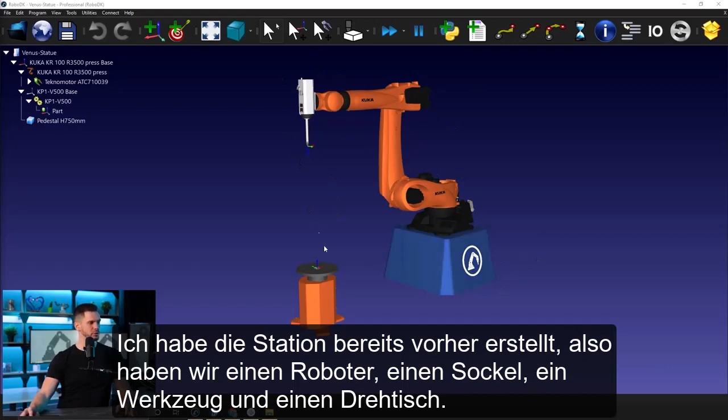Let's start inside RoboDK. So I pre-created the station. So we have a robot, we have a pedestal, a tool, and a turntable. So the first thing you need to do is synchronize the turntable and the robot together. This is required so that when RoboDK generates the robot program, it makes sure to have the turntable at the right position for every move, and that both the turntable and the robot will synchronize their speed together to give you the best finish possible.

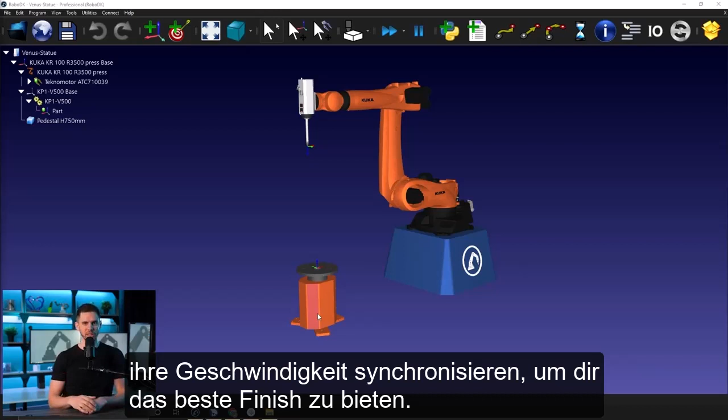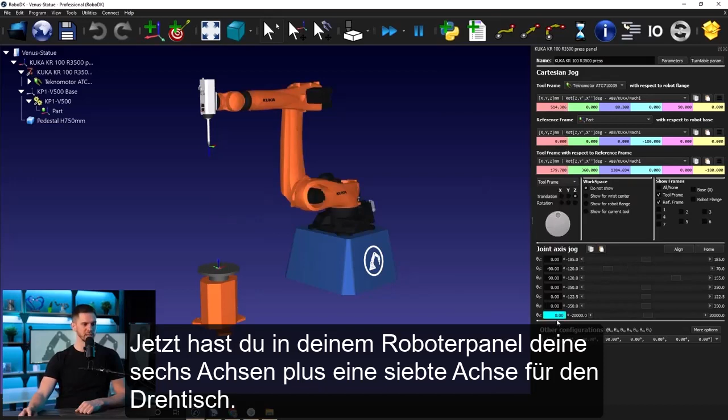So to do that, fairly easy. You right-click the robot, you select Synchronize External Axis. It will bring up this window here. You select under Turntable and Linear Track your turntable, in this case the KP1 V500, and you click OK. You will now have in your robot panel your 6 axes plus a 7th axis for the turntable. And here you will see a small kind of chain link showing that those are synced together. So that's great. Okay, now let's open BobCAD.

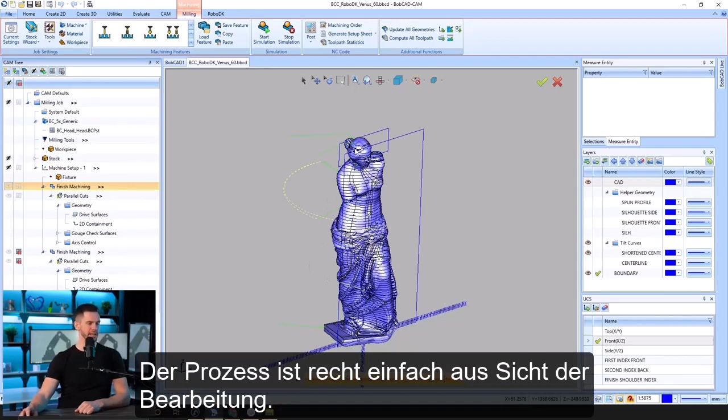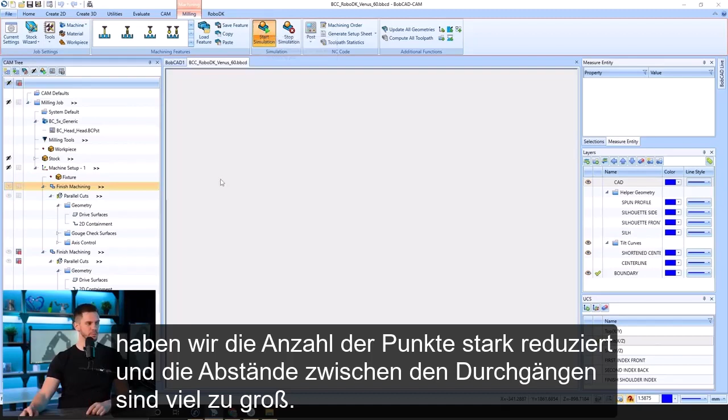So for this example, we have indeed a life-size statue. So the process is pretty simple from a machining standpoint. We'll just do a spiral from the head to the feet, starting from the top and going down. For the sake of keeping this example simple and for it not to take forever in terms of processing, we greatly reduce the number of points, and the passes are way too far from one another. We would recommend you to have better machining parameters than that, but this is just so that we keep the number of points relatively low to speed up the process.

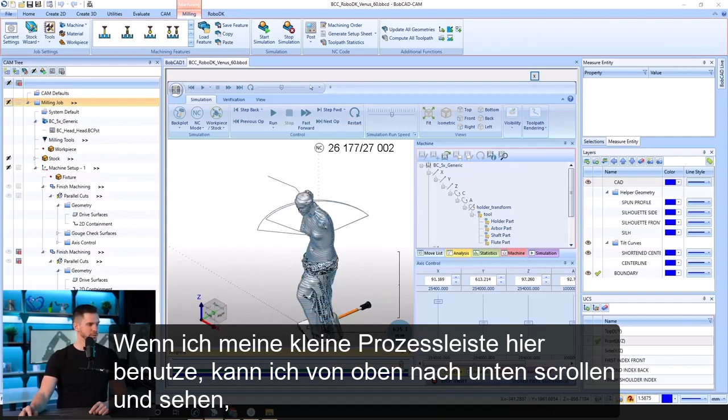So if I use my process scroll bar, I can go from the top to the bottom, and you see how the tool should behave along the path. So that's great. So I can leave the simulation environment.

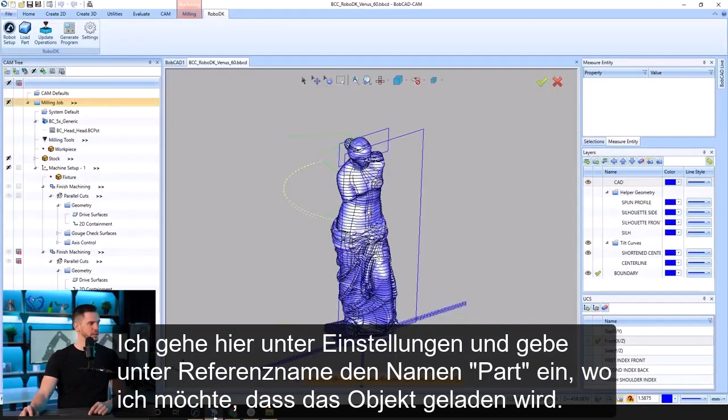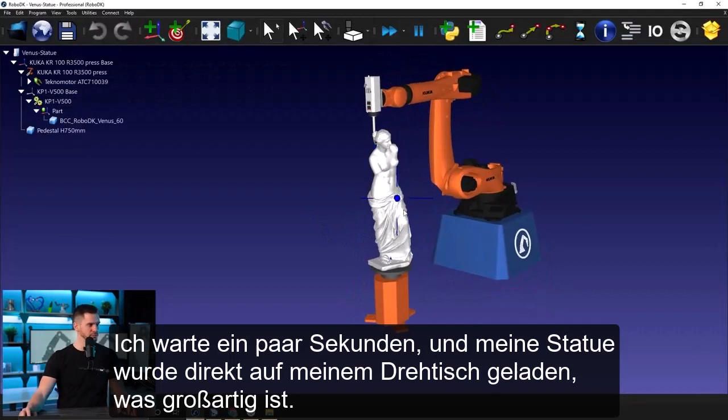First, the thing we'll do is bring in our part. So I'll just go back to RoboDK and make sure that part is the frame activated. I will go under settings here, and I will enter under reference name the name part, which is where I would like the object to be loaded. I'll select load part. I'll wait a few seconds here, and my statue was loaded right on top of my turntable, which is awesome. So if I double click the robot and then rotate my turntable, the statue will move with it. So if I go back to BobCAD, so here we have the path.

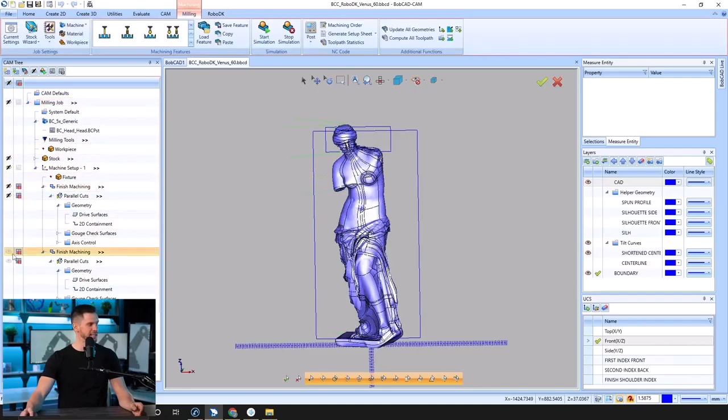But the thing is, when you have to optimize a path using 7 and 8 and even 9 axes, which we support, it makes things a bit more complicated for RoboDK in the background. So calculation takes more time. So when you press update, it might take a few seconds to a few minutes. So what I recommend people to do is to isolate a section of their program. So in this case, with those little rectangles, I isolated the head, and use that section as their testing section here.

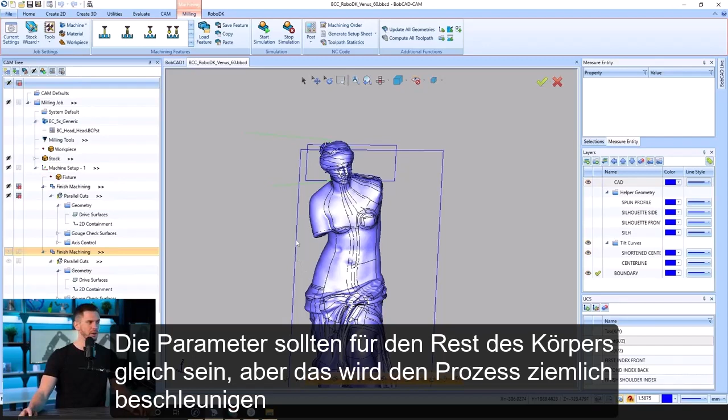So if I was to bring that up here, as you can see, I have, let's say, a few lines in the face or around the head and up to the shoulder. So I'll take that section here first. I'll bring it to RoboDK to do the testing and the optimization. The parameters should be the same for the rest of the body, but that will speed up the process quite a bit, or speed up the iteration if I ever have to do settings iterations to figure out the proper

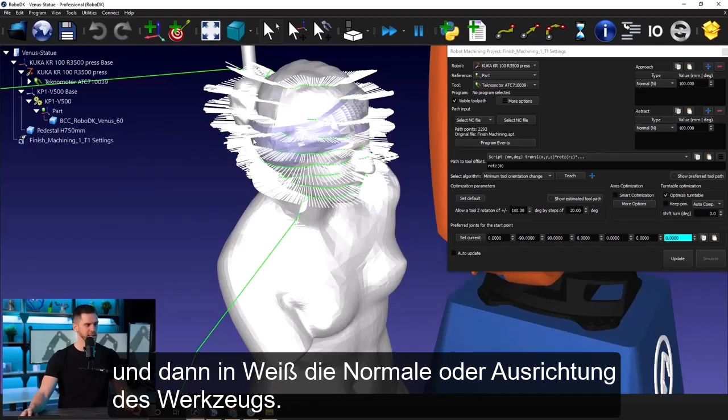settings. So I'll just click Update Operations, go back to RoboDK, close the robot panel, bring the robot machining project here. As you can see, if I come close, you will see the lines in green, which are the tool path, and then in white, the normal or orientation of the tool. So just here for the head, we have 2,300 points almost.

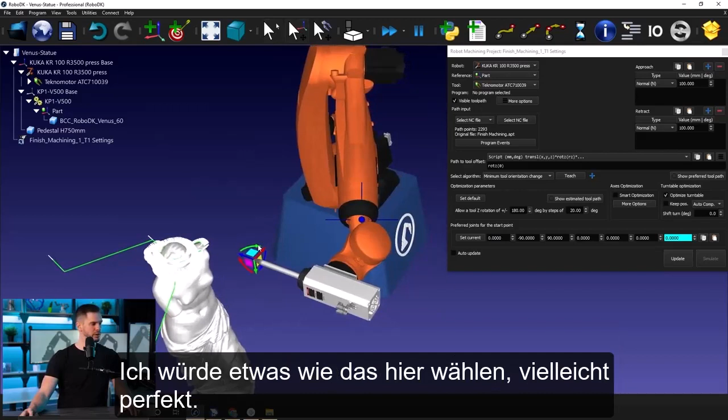So the first thing you will need to do is, same as before, move the robot into the starting position that you would prefer. So I would go for something like this, maybe. Perfect. I will move that here on the side. I will double click my robot panel. Here I created a turntable that has a lot of, let's say, degrees of rotation.

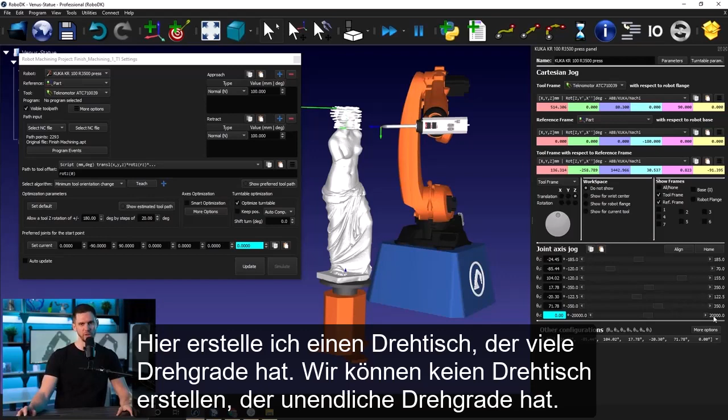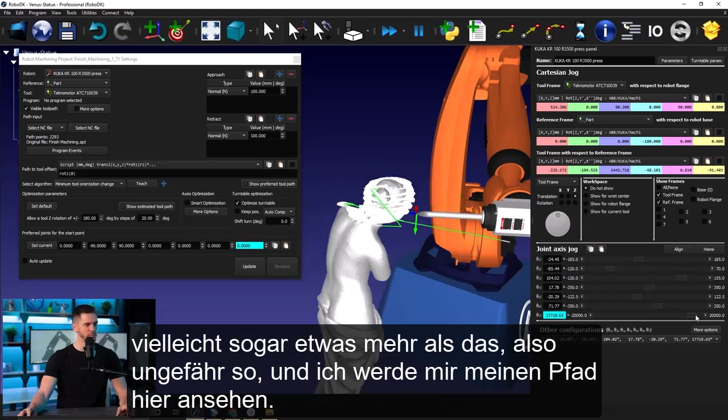We can't with RoboDK create a turntable that has infinite degrees of rotation, but you can double click here the limit and just add a very, very big number to kind of simulate that. So I'll just bring my turntable towards one limit, not exactly at the limit, but towards the limit. So maybe even a bit more than that. So just like this. And I will look here at my path, I'll get a bit closer. And as you can see, it's kind of spiraling that way.

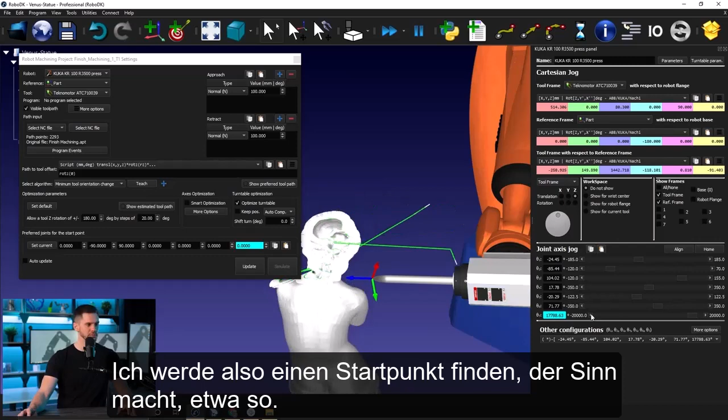So that means that I will have to spiral towards the negative values of my turntable, which is fine. So I'll go and I'll find a starting point somewhere like that. That makes sense. I will create a target here. So if I need to go back, I'll just have to double click on it. I can make it invisible. Perfect. I can close this here.

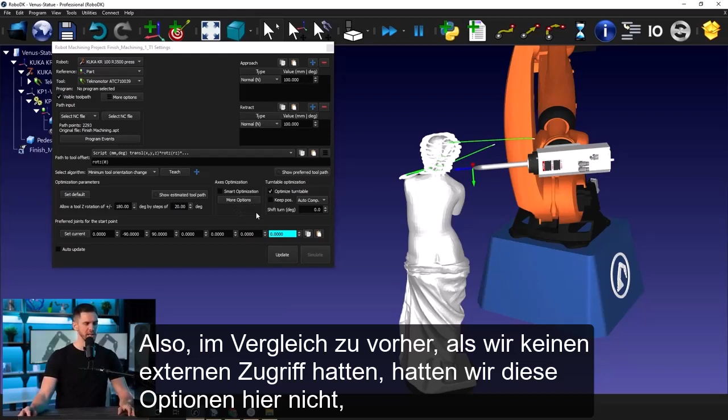So what you will see is, compared to the first day when we didn't have any external axis, we didn't have those options here. So axis optimization and turntable optimizations. Both should work for that process. In this case, I will go for the smart optimization, but that turntable optimization should work because we only have one axis here. So what I will do is I will click on the teach here so that I

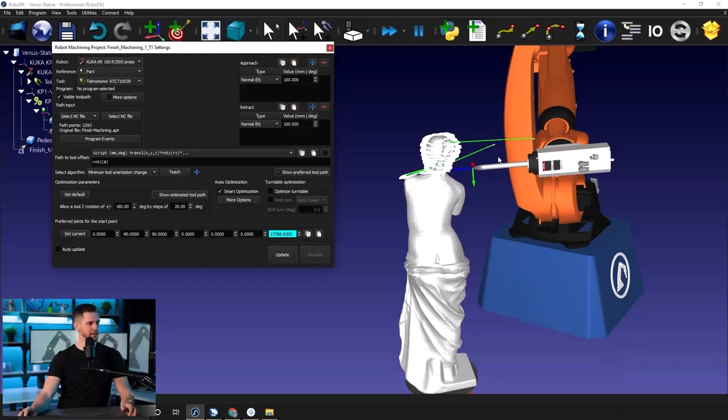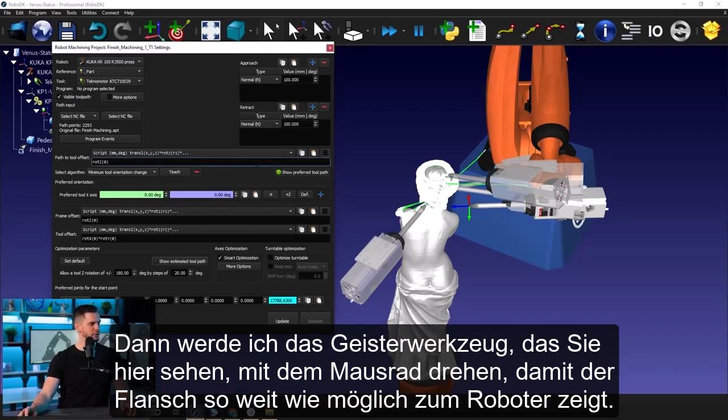record this here. If I click on show preferred toolpath, in fact, I will click on the Z plus here first of all. In another video, I'll show you exactly what this does, but this pretty much just makes sure that the X-axis of the tool is aligned with the Z-axis of the robot base. And then I will use my scroll wheel to rotate the ghost tool that you see here so that the flange is always pointing towards the robot as much as possible.

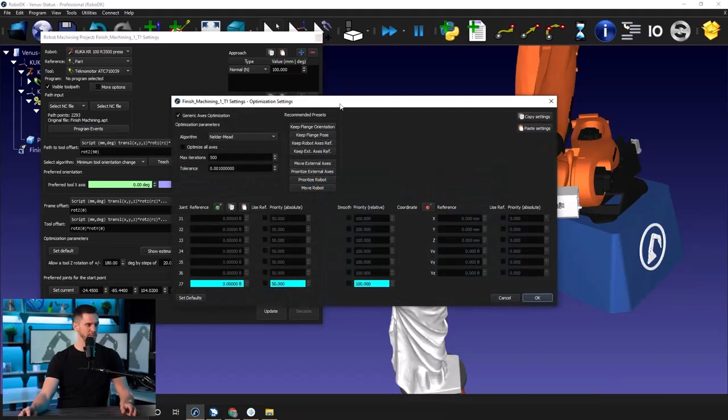So that's great. Then I will click here to set the current position of the joints as my starting point, and I will open the optimization parameter window. So this here can be a bit frightening when you take a look at that, but what's most important is what we have here. So it's kind of a recommended preset. So what do you want to keep?

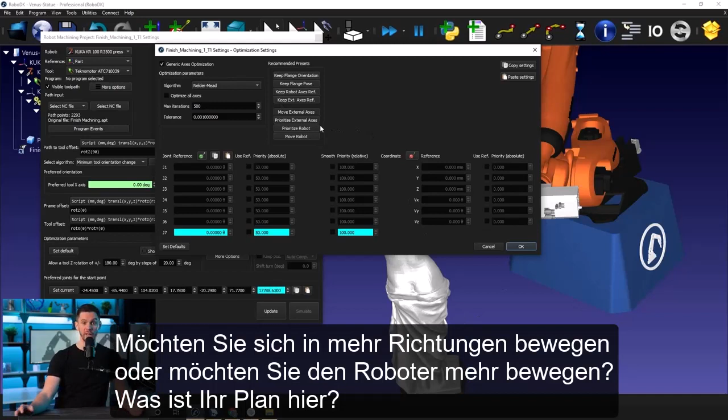The flange orientation. Do you want to keep the flange pose? Do you want to keep the axis reference, or do you want to keep the external axis reference? Do you want to move more the external axis? Do you want to move more the robot? What is your game plan, in fact, here? So in this case, my game plan will be to keep that tool or flange orientation.

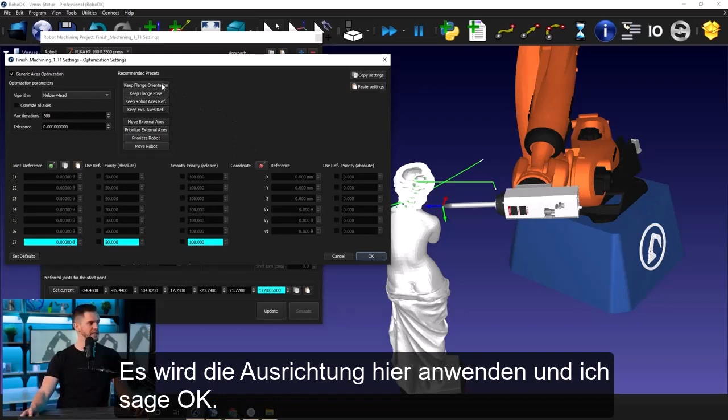I don't care about the position. It can go up, down, forward, backward. I don't care. But I would like it to be always in this direction here. So I'll go to keep flange orientation. It will apply the orientation here and say, okay, I would like to use this reference. And it will say, okay, you can move the turntable as much as you want, like that.

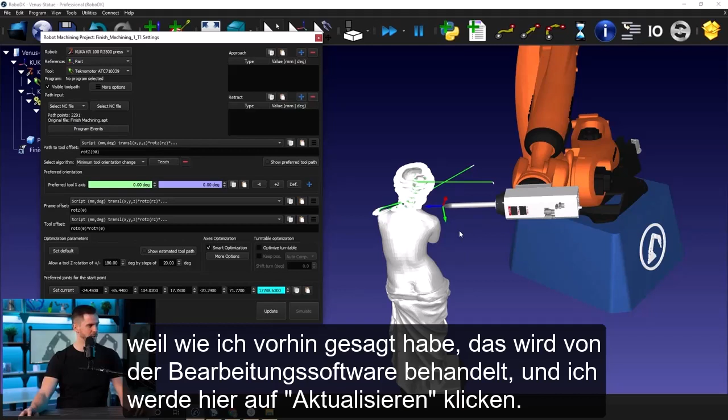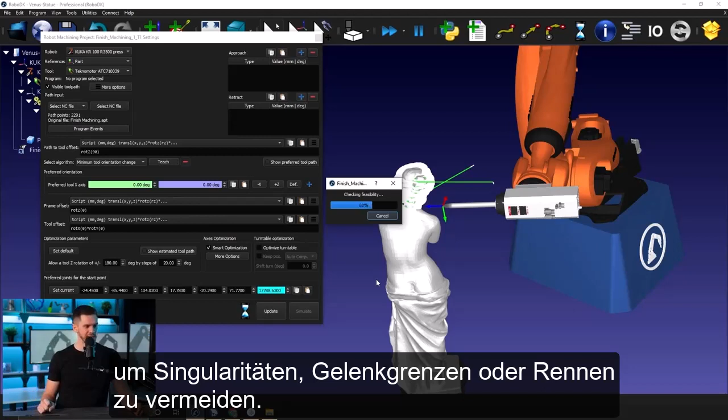So if I click this here, I will remove the approach and retract motions, because as I said before, this is handled by the machining software, and I'll click update here. This will take a few seconds. It will take less time if you don't have optimization parameters, which I will certainly do for the bigger path. Optimization parameters will make you rotate around the Z-axis of the tool to avoid singularities, joint limits, or axis limits. As we're using a turntable, those should already be avoided by the turntable, but just in case.

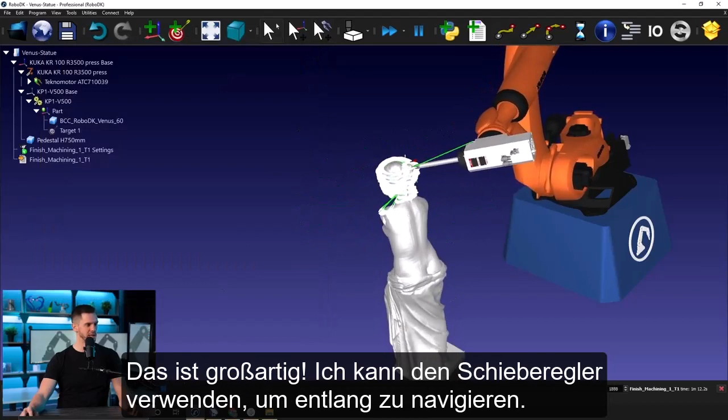So now we have a nice green check mark here. So if I click simulate here, I'll see what the path looks like. So this is awesome. Great, so I can use the slider to move along.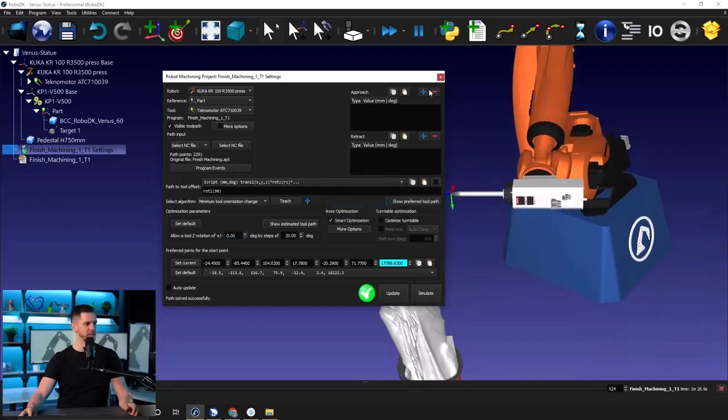Awesome. If I reopen it here and I insert here, allow a tool Z rotation of, let's say 0, because I don't want to have any rotation to avoid singularities, then I click update, it's much faster. And in this case, it still gives me my green check mark. So that's very cool. Awesome. So I can stop that here.

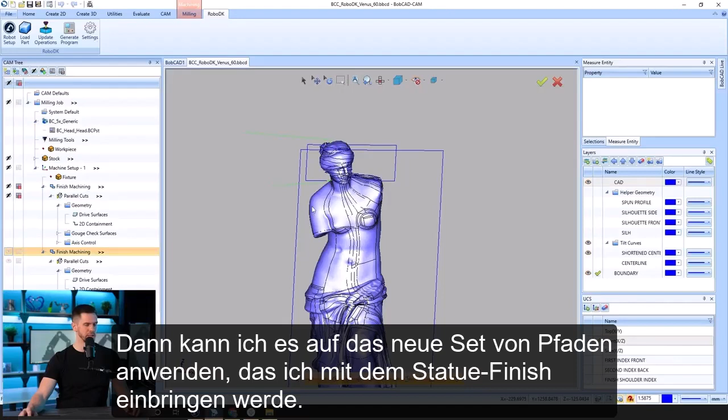What I will do is right click here, more options, copy settings. So then I can apply it to the new program I will bring in with all the statue finishing paths on. So this one here. So I'll go back to RoboDK and then update operations. It simply updated the one we had before, kept the same values because the name was exactly the same. So that's cool. I can select update.

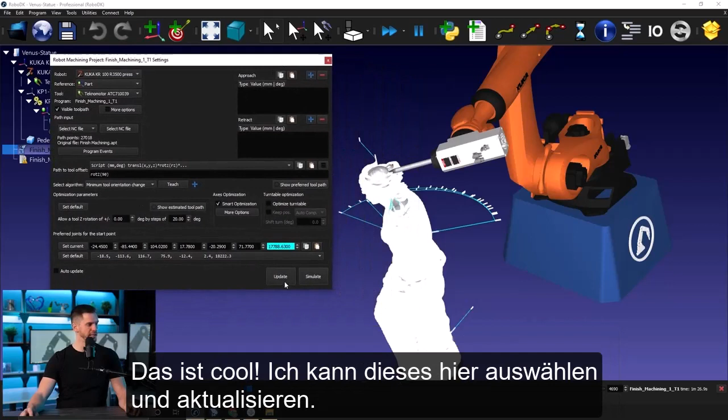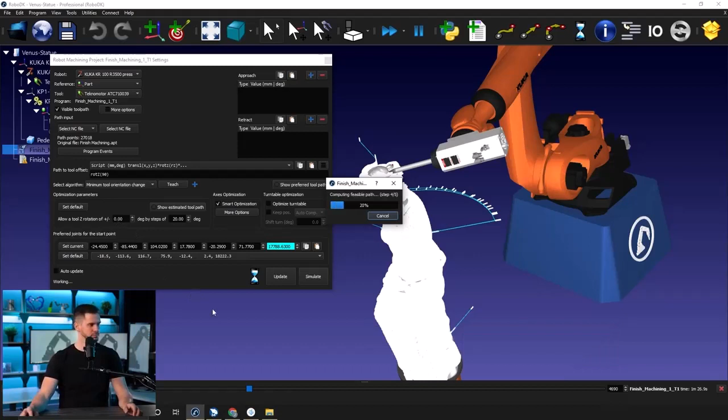This one will take a bit longer. If you have the optimization parameters activated, this will take several minutes. So if you can give it a try without the optimization parameter, so just with 0 here, that would be even better. Okay, wait a few seconds, updating, checking if everything is fine. There's 27,000 points to take care of.

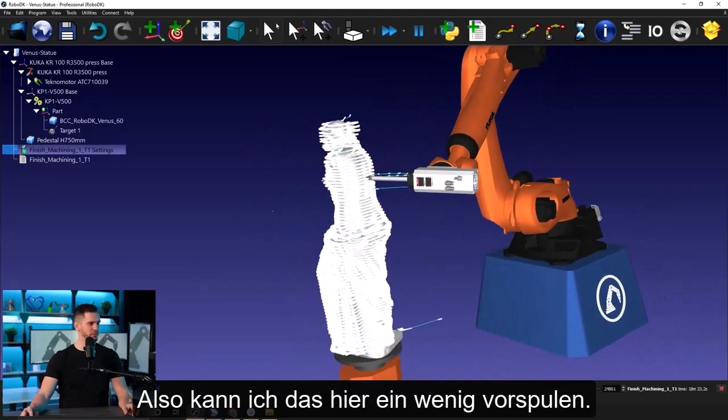If I click simulate here, it will find my starting point, and then will rotate around the part like that. So I can fast forward that a bit here. Okay, great, awesome. I could activate the collision checking option if I feel the need, which I don't in this case here. The last thing I have to do is right click this robot program here and then generate robot program, which will open VSCodium with our program.

So as this program is very, very long and potentially does not fit onto the memory of the robot controller, it was automatically split into smaller pieces. So we have finishing machining and finishing machining 1, 2, and 3. This is set up by a limit of lines in the post processor. It will simply call the next program at the end, and so on and so forth. So that works very well to split up a program into smaller pieces that are more digestible for the controller, but you can change that option too.

So that's pretty much everything for this tutorial. I hope it was helpful, that you can see how you can use BobCAD-CAM and RoboDK together to create a huge working envelope for your project. So that's good. And in the next video, I'll show you how to install the plugin and a few settings that you might want to play around with a bit to just make sure that your experience is as good as possible.